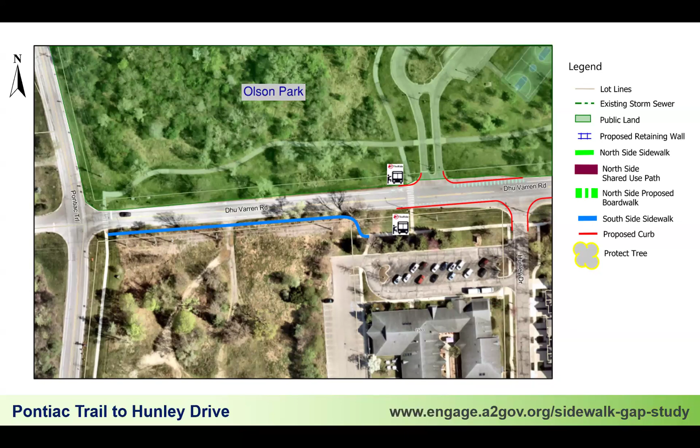The red lines that you see there, that is removing what we're calling those auxiliary lanes, that acceleration, deceleration lanes. That's kind of a thing of the past that was used on high-speed roadways. We're trying to reduce the speeds on these roads, not encourage people to drive fast. So we're going to be getting rid of that feature there in order to create space for better sight lines.

Next slide here, as we progress to the east, we are connecting to the sidewalk that exists from the condominium unit on the south side of the road, across from Olson Park. Again, Olson still has a pathway that exists along the north side, so we just have to focus on the south side there.

So essentially, it's going to continue on the south side where there's a gap on 1, 2, 3 parcels, and then connect to, I believe, a commercial development across from Carrot Way.

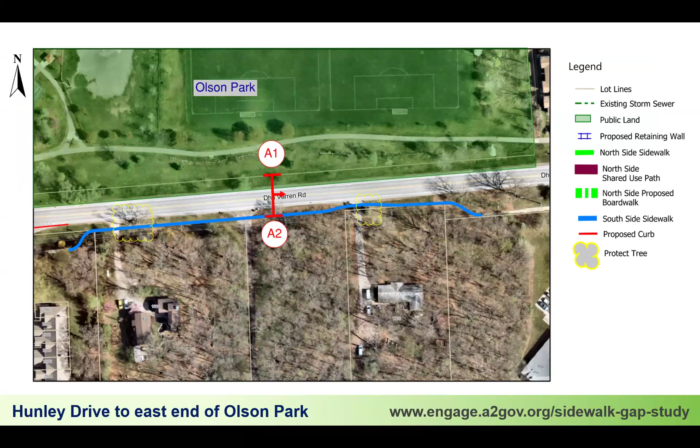Okay, so first one, section A, which is more or less 400 feet east of Hunley, going back to directly across from Olson Park, where the soccer fields are present today. So that is the cross section that you would be looking at on this slide as we go back and forth. In the upper left corner, that gives you an aerial view with an arrow showing approximately where this cross section is cut.

And then you have a street view to the right from Google that shows you what it looks like today, to give you perspective on what we're proposing on this cross section, which reflects what we're showing on the aerial views. So we have the existing pathway shown on the north side for Olson Park, and would be focused on the south side of the roadway.

And that area would be a 5-foot sidewalk. We'd want to maintain drainage from the roadway between the sidewalk and the roadway itself, so we wouldn't need any type of enclosed drainage system.

One of the things I mentioned at the previous presentation was that in some areas, drainage and a sidewalk can't coexist, meaning there's not enough space for the sidewalk - it has to go right on top of where the ditch is today. So the water has to go someplace, and that's when you would implement an underground system of storm sewers. Fortunately, in this case, you don't need it, so that saves on costs.

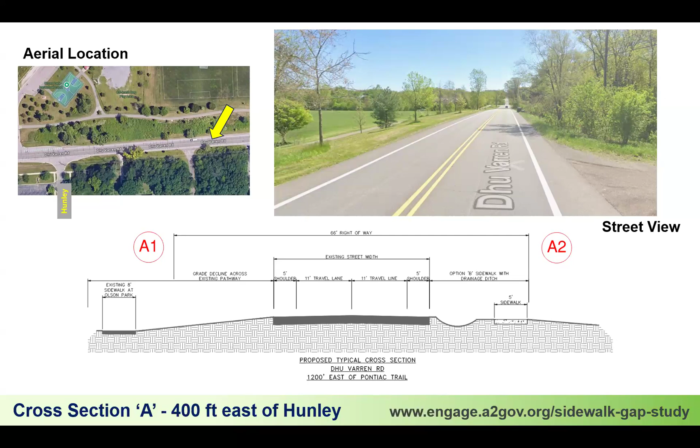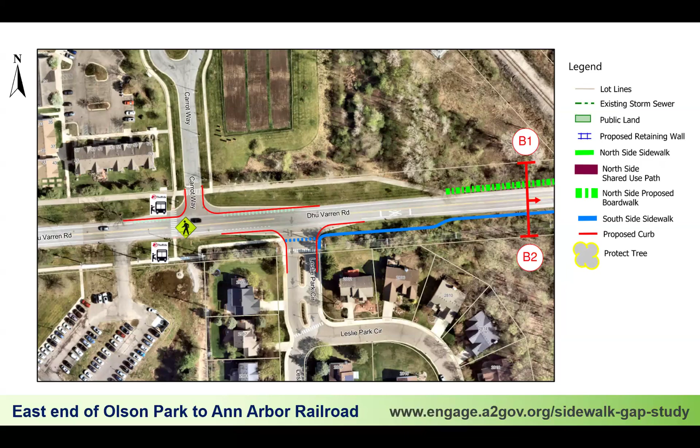Okay, so moving on to the second cross section, B - go back to the big view. B is closer to the railroad tracks, but between Carrot Way and Ann Arbor Railroad, near that depression area where the creek is. So again, you can see the yellow arrow where it is today.

And they have guardrail on the north side because topography falls off, give or take from memory, 8 to 10 feet down to the bottom. And then it's more of a gradual fall-off on the south side of the roadway where there's a shelf - we'll call it a shelf area, limited, but nonetheless a shelf. And then it starts falling in grade.

So this is one of those areas where we're proposing, in this specific area, that 14-foot boardwalk behind the guardrail that's there. The distance of that in proximity to one another would be to be determined - we're just showing it at a relative distance away from each other to give you a schematic of what it would look like. So it's elevated above the ground, won't be prone to flooding - it would be set at the right elevation.

So then within your roadway, you have your 5-foot shoulder, but it's treated as a bikeway today. And then you'd have 11-foot travel lanes on each side, 5-foot shoulder. And then on the south side of the roadway, we show a 3-foot buffer - buffer is just a fancy word for space between the sidewalk and the back of curb to enhance safety and give ease to the walker so they don't feel like there's a car rushing by them.

And then we have the 5-foot sidewalk with what we call a clear zone. That's nothing more than a fancy term for a little shy distance to create separation between a fence and the sidewalk. The fence would be there to protect pedestrians from falling off, in a case like this where the topography goes down and we show a retaining wall there. So that's why you see a clear zone - think of it like this: if there were a bicycle on the sidewalk, it prevents the handlebars from catching that fence. So it's kind of a safe space that's provided.

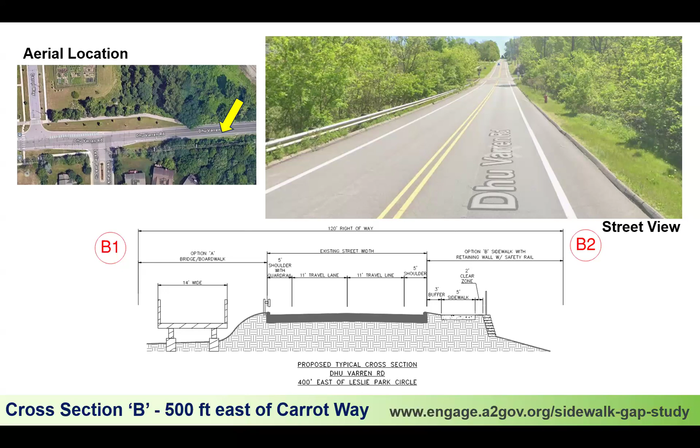Okay, cross section C - this is 350 feet east of Birchwood. So we are just east of the DTE substation that's there today.

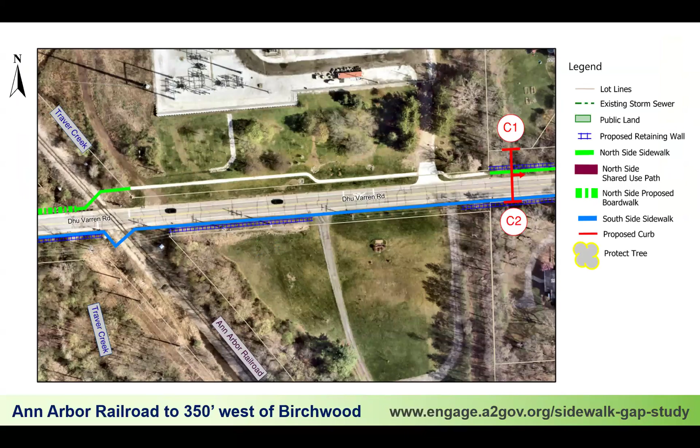So you can see in the upper left where approximately that cross section shows. In the existing view for today, they have what we call an asphalt curb on the north side of the roadway, concrete curb on the south side, and bike lanes on both. So in order to facilitate a non-motorized walkway on both sides, we have to provide and engineer for it.

Both cases require a retaining wall. Focusing on the north side first, we'd still have that 3-foot buffer space between the back of the asphalt curb, a 5-foot sidewalk, and a 2-foot clear zone away from the retaining wall. Similar to the north side, the south side has a 3-foot buffer space, 5-foot sidewalk, and 2-foot clear zone, mirror images of each other. That would retain the existing layout with pavement markings of the bike lanes and the 2 travel lanes.

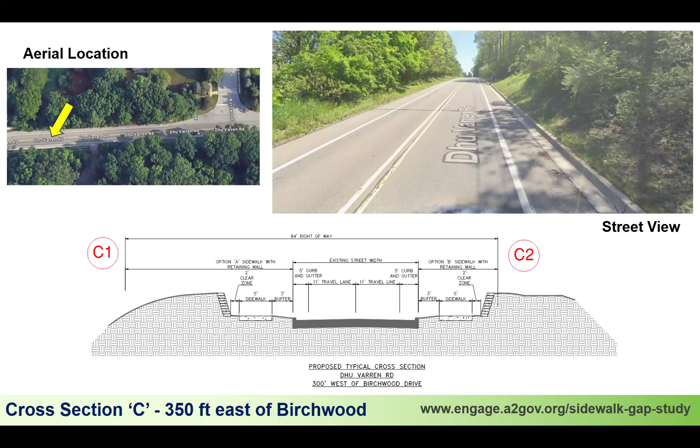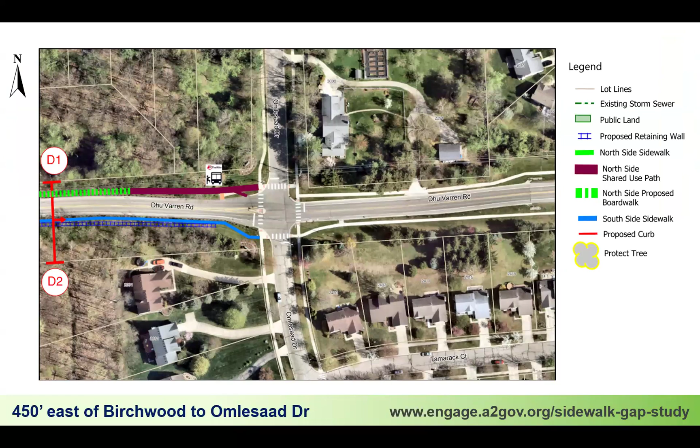Omlesaad Drive, so just 450 feet, give or take, east of Birchwood in this case, 300 feet west of Omlesaad, guardrail again on the north side with that asphalt curb, and guardrail on the south side also with an asphalt curb there. So this is the area where we're showing again that

boardwalk, that would just be a bridge. Distance between the boardwalk and the guardrail that exists today is to be determined, but again placed at the right elevation so it's not impacted by water levels. That would then turn into a non-motorized pathway as we get closer to the end of the project to facilitate as a bike path, because there is no bike lane in this section on the north side of the roadway.

On the south side of the roadway, you've got the 3-foot buffer space behind the guardrail, 5-foot concrete sidewalk, 2-foot clear zone with a fence there to protect people from falling off behind the retaining wall into the existing space that exists today.

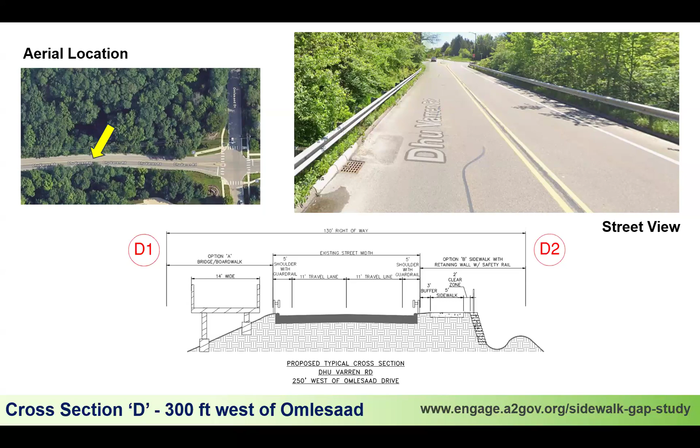Okay, so now we're going to segue into projected costs. We're almost near the finish here. We start engaging with you folks.

So we estimate that on the north side of the roadway, it is using 2025 dollars. If this project were to happen 5 years from now, it would need to be inflated. $4.7 million on the north side of the roadway versus $5.2 million on the south. So it's not a substantial difference. In our industry, $500,000 is not substantial when it comes to funding categories, but it's still a difference, so we don't want to minimize it.

And then here's the important one to state. At the last meeting, we talked about the sidewalk millage and what it can and can't cover. So for those that were here, the money collected from the property taxes for that millage cannot be spent on public lands to build sidewalk. So some other resource would need to be utilized in order to build the sidewalk proposed across Dhu Varren Woods. So what does that mean?

Well, it could come from the park budget. That would be difficult because they have a lot of demands. But there are other sources of funding at the state and federal levels that can be utilized in order to offset the monies that can't be used from the sidewalk millage to build a sidewalk along the frontage of Dhu Varren Woods.

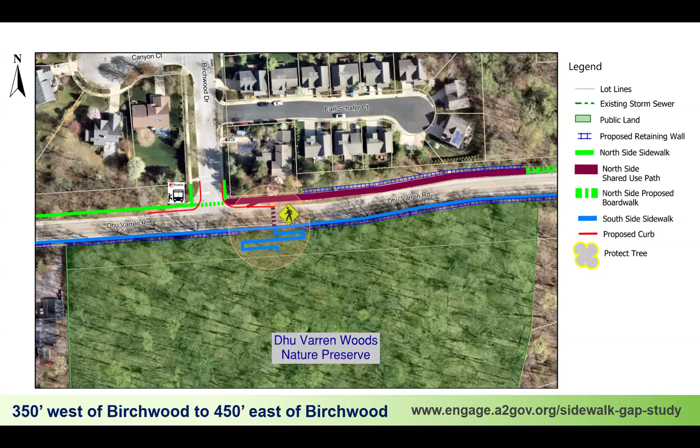So it's just a little difference to talk about. That's more of a city problem to find the right amount of funding for it. But I just wanted to point that out, the advantages and disadvantages. One could say, well, north side makes more sense because we could capture 100% of the dollars from the millage to use along the north side, since there's no public lands that a new sidewalk is being built on.

I'm pointing it out just as a fact, but it's more of a city administration problem to figure out where that comes into play. But it can make a difference under the right scenario of circumstances in a certain budget year that can't be predicted today. So I'm just pointing that out as a little fine print.

So what are some of the advantages and disadvantages that we can point out here when we look at north side versus south side? One of the big things we broached on last time was trees. We are projecting, this is a rough number, we don't have topography to know the exact number, but we suspect there's going to be about 40 trees that would need to be cut along the north side of the road from the beginning to the end of the project, and give or take 70 on the south side, mostly because of Dhu Varren Woods, the nature preserve that's there.

As far as tallying up a score, if you want to call it that, we just placed more trees impacted on the south side, less trees impacted on the north side.

As far as environmental impacts, that goes hand in hand with the estimated trees, because we'd be mitigating the wet areas with the boardwalk, limiting disruption in wet areas as opposed to filling it in with dirt, which would be a major impact to the environment. So that kind of is a wash from that perspective.